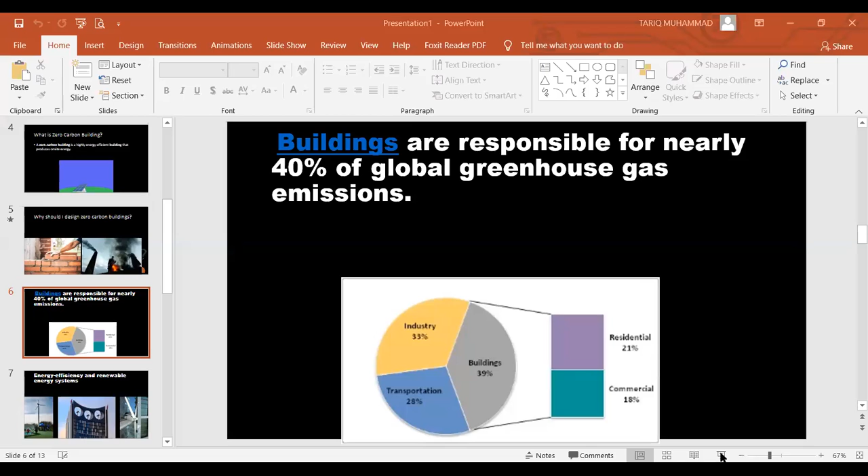Buildings are responsible for nearly 40% of global greenhouse gas emissions. This is a very giant figure. 40%, meaning this is the current CO2 emission happening in the world right now.

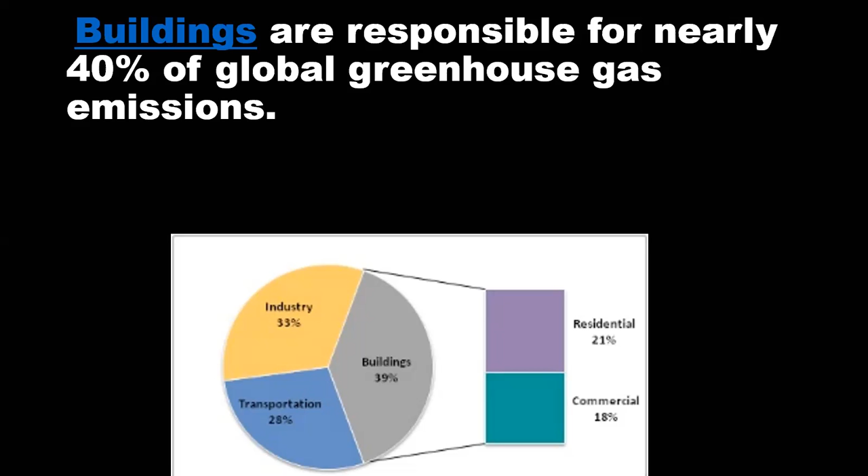Now, what are these strategies? What strategies can we use to design zero carbon buildings? And perhaps this is what I love the most. This is the first thing we can do: make our buildings energy efficient.

We can install solar panels on the rooftop, but solar panels are not the only solution. In many areas where the wind blows very fast, like in Gwadar, like in some areas of the Karachi region, we can install wind turbines on the rooftop.

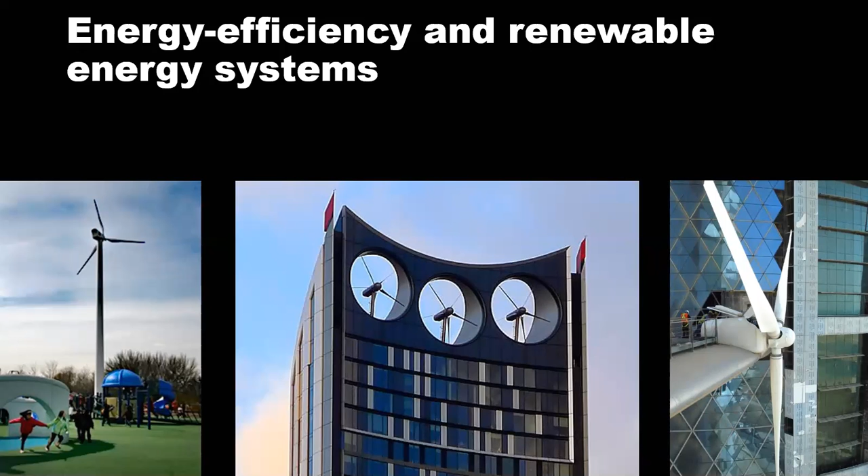If you look at the Bahrain World Trade Center, the two towers are linked by 3 sky bridges, each holding 225 kilowatts of wind turbine, totaling 675 kilowatts of wind power capacity. Each of these turbines is 95 feet in diameter.

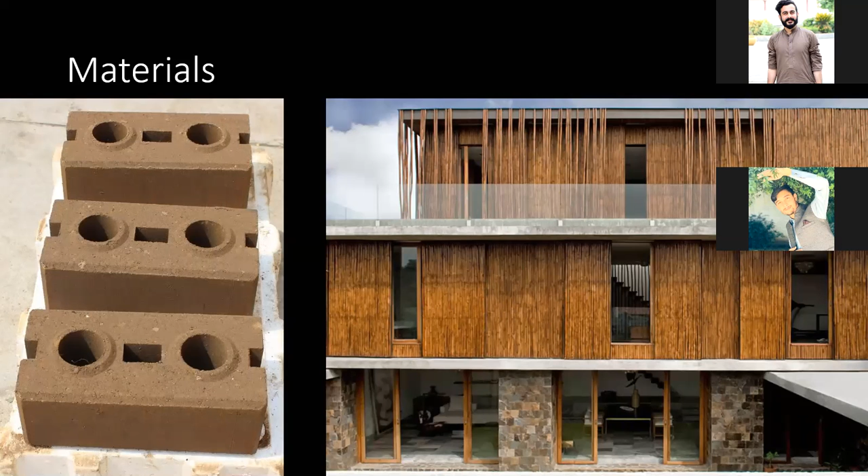And then we come towards rainwater harvesting. In your next project, I'm sure you'll incorporate the rainwater harvesting system. Now what is a rainwater harvesting system?

Rainwater harvesting system works by collecting the rain from the roof and filtering it, then storing that water into a tank to reutilize it for plantation, for watering plants, for toilet flushing, for kitchen sinks, and many other things.

You can use that rainwater which comes down from rooftops onto the road, and then flows uselessly into sewerage, canals, rivers, and seas. So why not utilize that rainwater into something useful? You can do it - it's a very simple technique.

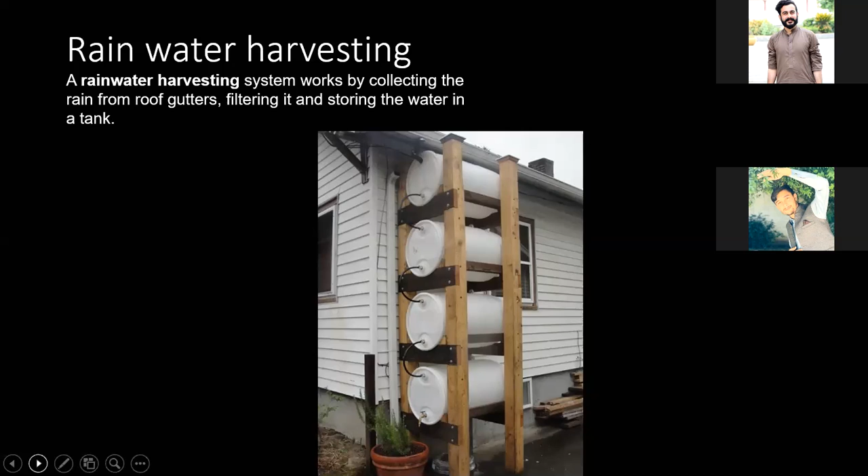And this is what you will love when you see it - this is called the green roof or roof gardens.

Land prices have become very high, so the government is no longer willing to provide parks - they're almost disappearing. So why not make a park on the rooftop of my house?

A green roof has its own construction details - vegetation layer, planting medium, waterproofing layers. When you do this in your projects, you have to provide these details, because you need to consider seepage in the building, roof loads, and soil loads on the roof. So you'll discuss it with the structural engineer, but when you do it, you'll probably like it - it's amazing.

I have seen in some countries, many people grow vegetables on it, many people also do barbecues on it, and many other things. So you can do it.

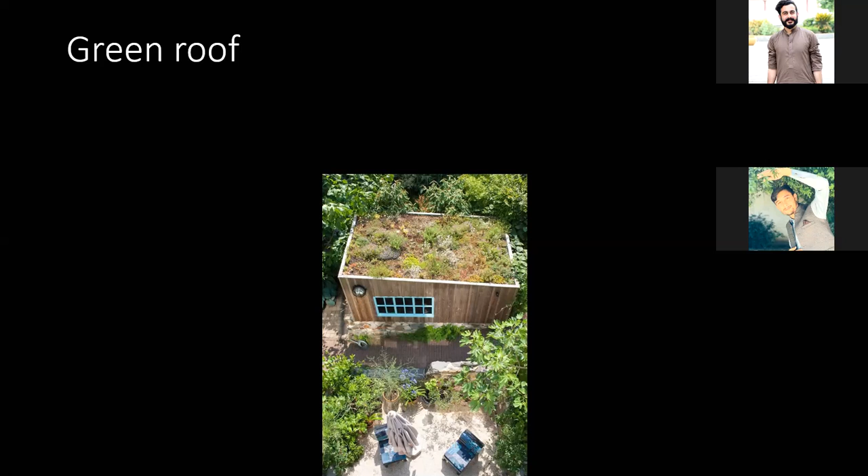You can do this in your next project. Like, all the 3D renderings of your next project could have the rooftop covered by either solar panels or roof gardens.

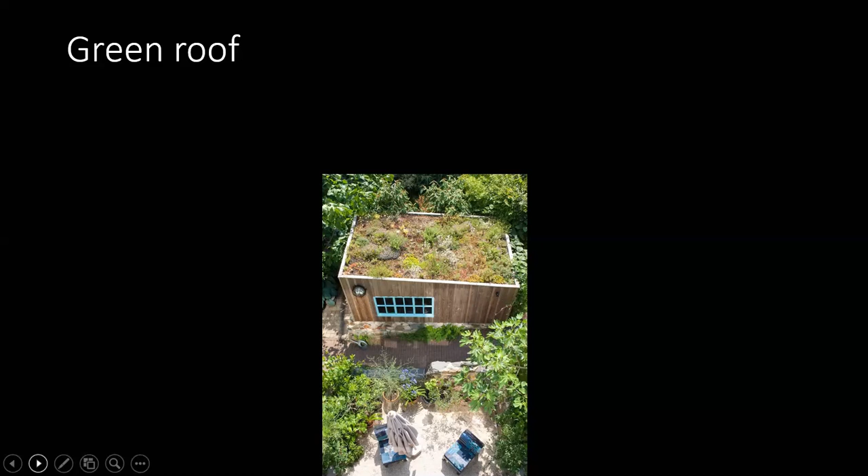And then we come towards daylighting. You have to provide windows in that direction to capture the natural light inside your building. Look at the window of the room you're sitting in right now - there is natural light outside, but it's not coming into your room, your drawing room, your dining room, your studios.

Why? Because you are deprived of natural light, and our windows are oriented in a direction which is not necessary. Architecture is basically about studying whether the north side or south side gives you good lighting. If you're getting good light on the north side, then why are you providing big 8 by 8 foot windows on the south side?

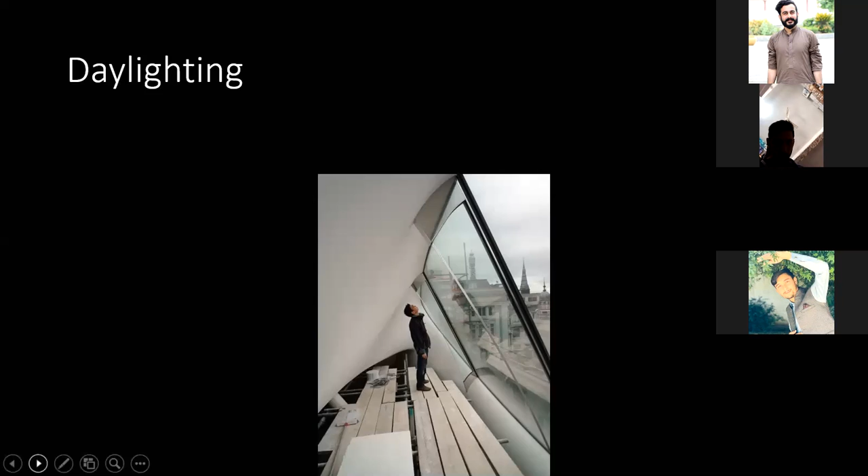In the home you're sitting in or the project you're designing, ensure that you use cross ventilation in that building. Like we give one window 8 by 8 feet, but there's no window on the opposite wall. Then what is the use of that one window if there is no cross ventilation?

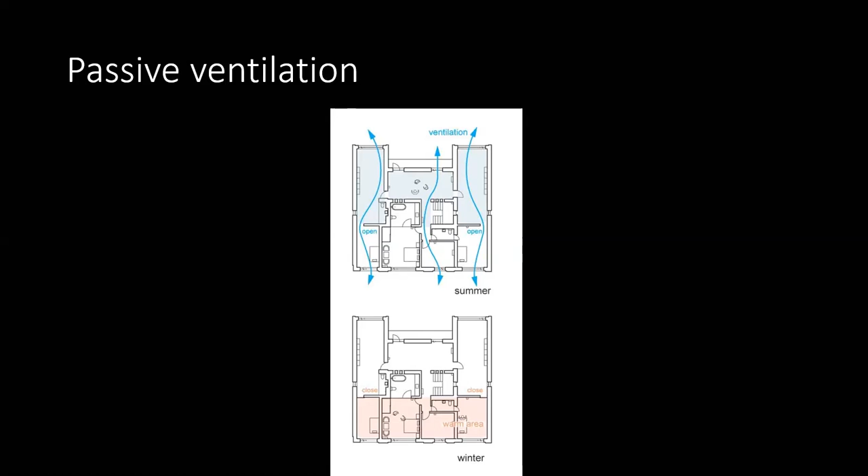So if you provide cross ventilation, if you provide windows in the direction which is good for wind flow, where the wind is coming from nicely, and you provide windows in that direction, then believe me, you can cut down the cost of the air conditioning system in the building, or the electricity cost inside the building.

So we talked about solar panels, we talked about roof gardens, we talked about the zero carbon building definition, and then we come towards rainwater harvesting, and the last one is passive ventilation. And these are all the strategies for the building to work.

And I think the architect can do it. The architect can do it - not a civil engineer, not a contractor, not a developer, not a medical doctor, not a lawyer - but we architects are basically responsible for providing the strategies for zero carbon buildings, and we design such buildings which contribute to the environment positively and not negatively.